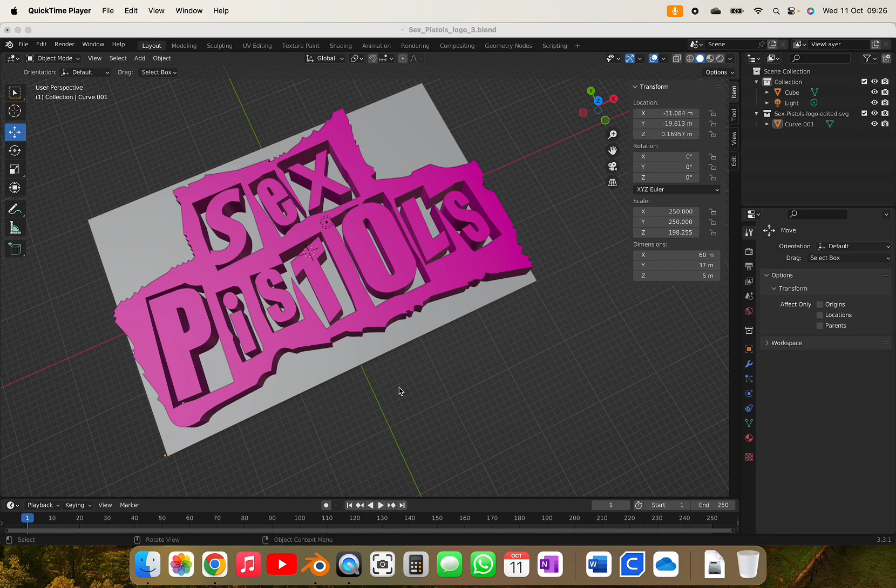Hello and welcome to this video, where I'm going to show you how to take this 3D model, and by the end of the video I'll have a physical item that's been 3D printed. To get there, I'll export this 3D model as an STL file, then import that STL file into a program called Ultimaker Cura. Cura will let me slice the 3D model so that the printer then prints out those sliced layers.

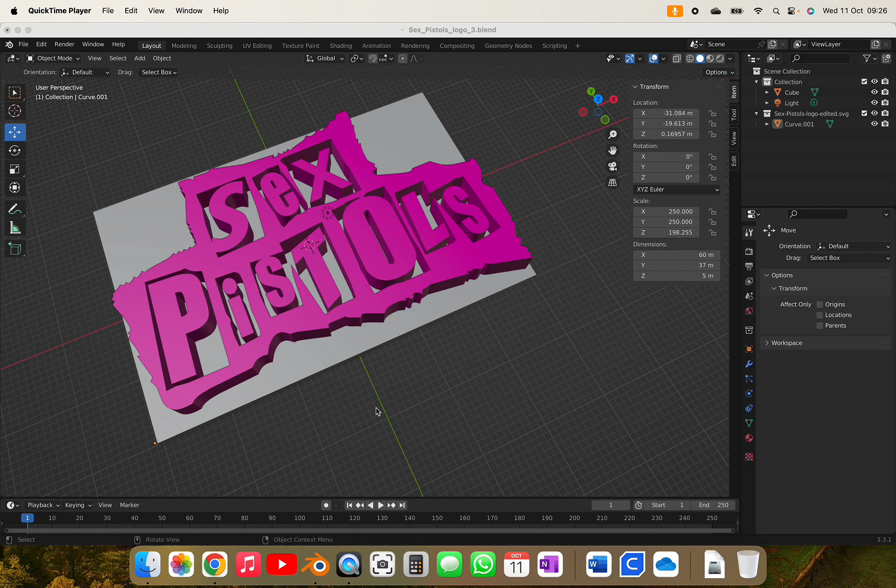Now what we'll do with that object is give it over to Guymer, who will use it to create an impression in sand that he can cast in silver, ending up with a unique bespoke model, a piece of art off the back of this model.

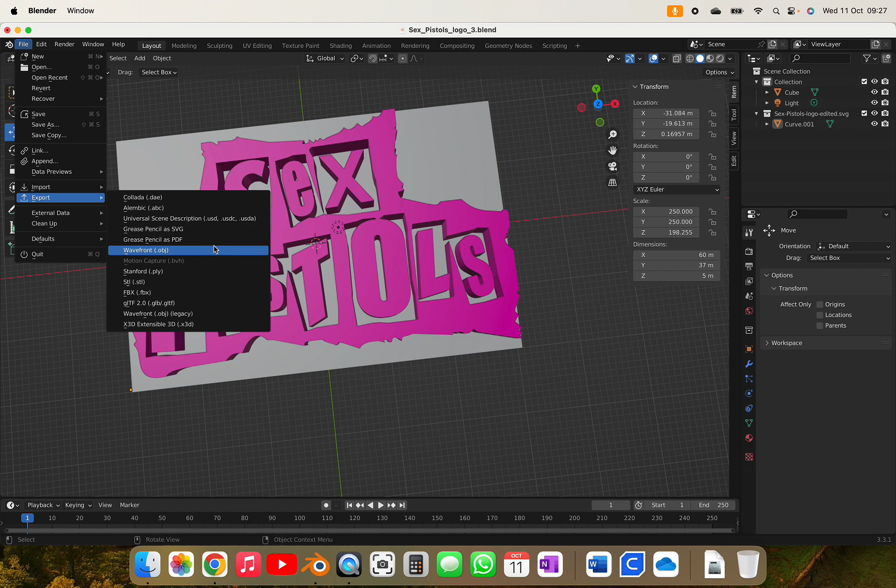So without further ado, I am going to export this model by going to File and Export, and I will be exporting as an STL file.

Now I've already done this previously, so I'm going to reuse that name, but I'll just put 'new' in front of it so I can identify the different STL file.

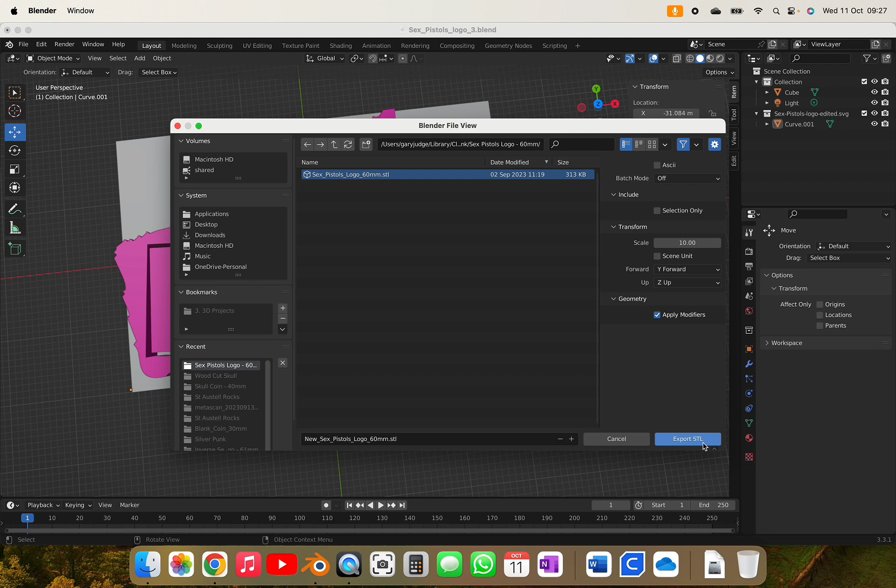And now that's done, I'm done with Blender now. It's as simple as that - just exporting as an STL.

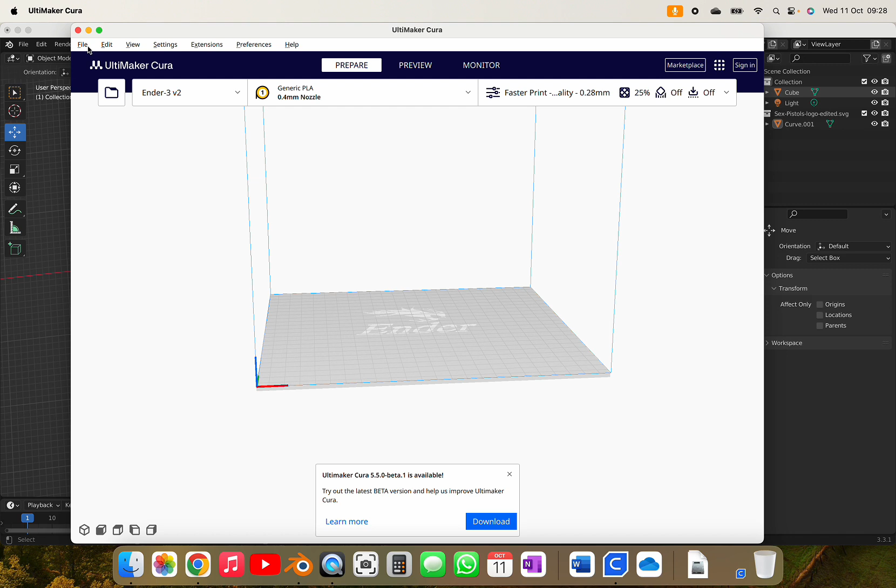I'm now going to open up Ultimaker Cura, and within Cura I'm going to do File and Open. I'm going to navigate to the file I want to import, which is the new Sex Pistols logo. This is 60mm wide along the x-axis, so I'm going to open that.

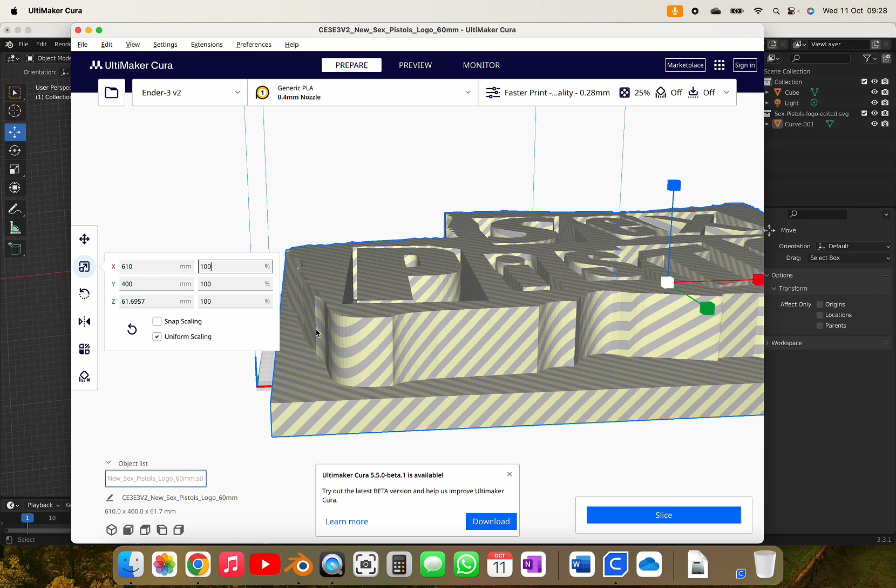Oh, and it's coming in larger than anticipated - this sometimes happens. I know for my own purposes I want this model to be about 60mm wide, actually 61mm. So I'm going to scale this down to 10%, and with uniform scaling ticked, that takes it to 10%. But as you can see here, the model is off and not on the print bed.

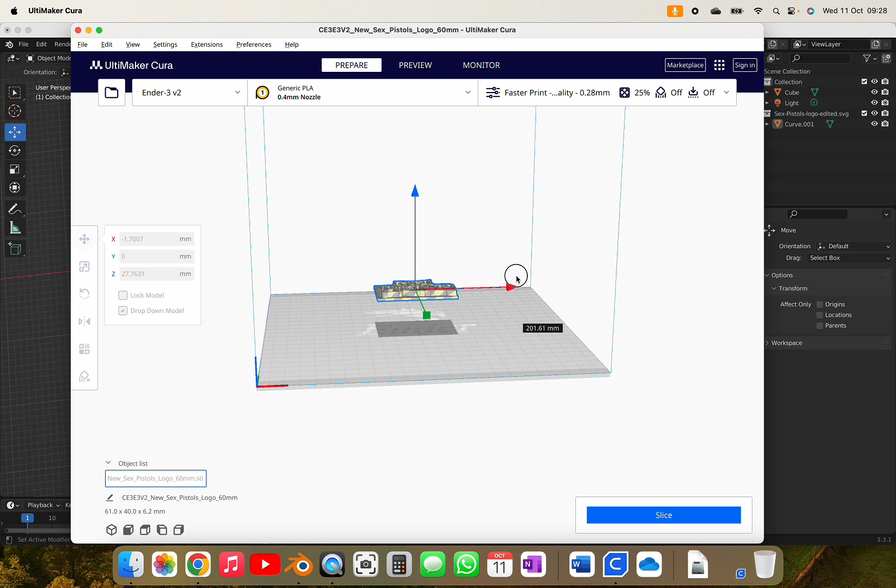So I'm going to try and just put 0 on there, for the move dimensions of the model. There you go - if I put zeros in there, it's actually done what we needed and put it in the center of the print bed.

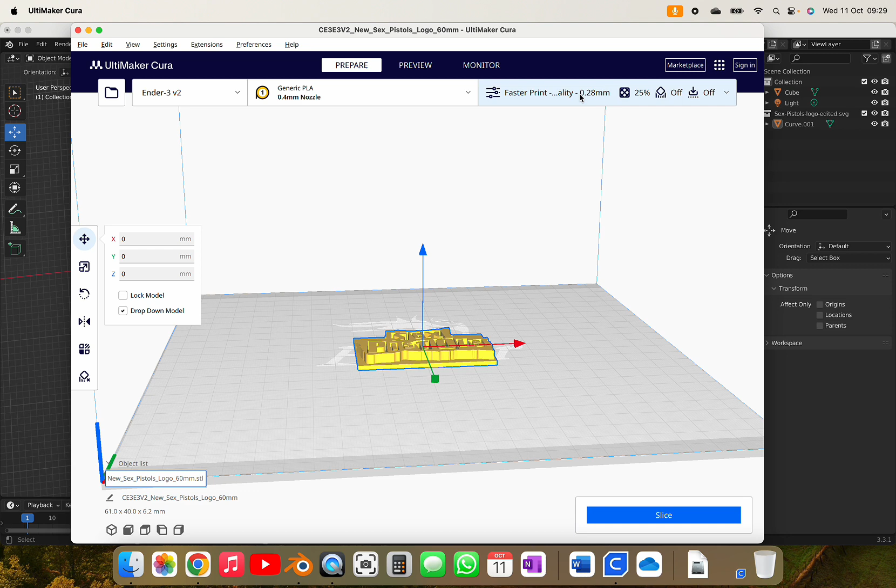Now before I slice this, I want to have a look at the print settings. At the moment I've got a faster print - it's one of my own profiles, but this is not suitable for this type of model, because of the level of detail that's in here.

If I use this faster print speed on my Ender 3 V2, I'll end up with some artifacts, some stringing, not enough detail - it won't be suitable for what I'm trying to achieve here. So instead I'm going to pick the highest quality default option, the super quality.

That's a 0.12 layer height. I'm going to discard the changes I'd made, so I'm taking all the defaults from the super quality profile.

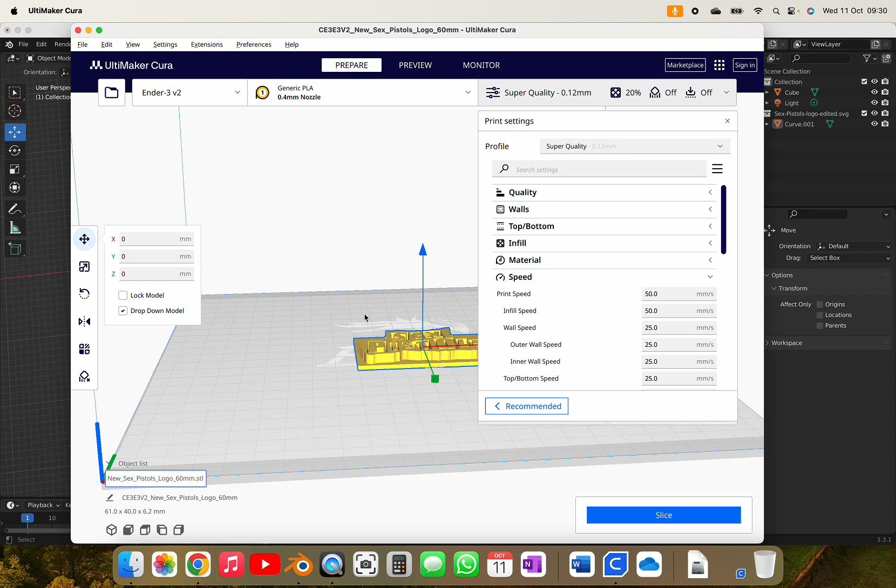Now that will mean the print is slower, but because this is a relatively small 3D model, and it's shallow as well, not terribly tall, that additional quality will take more time - it's going to take 2 hours and 47 minutes.

But if I just temporarily change this to, let's say, standard quality, you'll see that's faster. But for the sake of an hour, I'd rather have a higher quality, low risk print in this instance.

There'll be other models where I'll be a little bit more flexible with the quality, and that's where my faster prints custom profiles come in, because then I've got much faster speed for models that don't require the same level of detail. So your needs as to what level of detail is required, and how risk averse you are to actually getting your printout, should determine the settings you pick, especially if you're using the standard profiles before changing all of these one by one.

But anyway, that's what I'm going to do, and it's going to take 2 hours and 47 minutes. I'm going to save this to disk, and as you'll probably see, I like to keep all my files - so that's the Creality Ender 3 v2 new Sex Pistols logo 60mm. I'm going to save that G-code file along with the other files I've created - the Blender file, the exported STL files - and keep that G-code there.

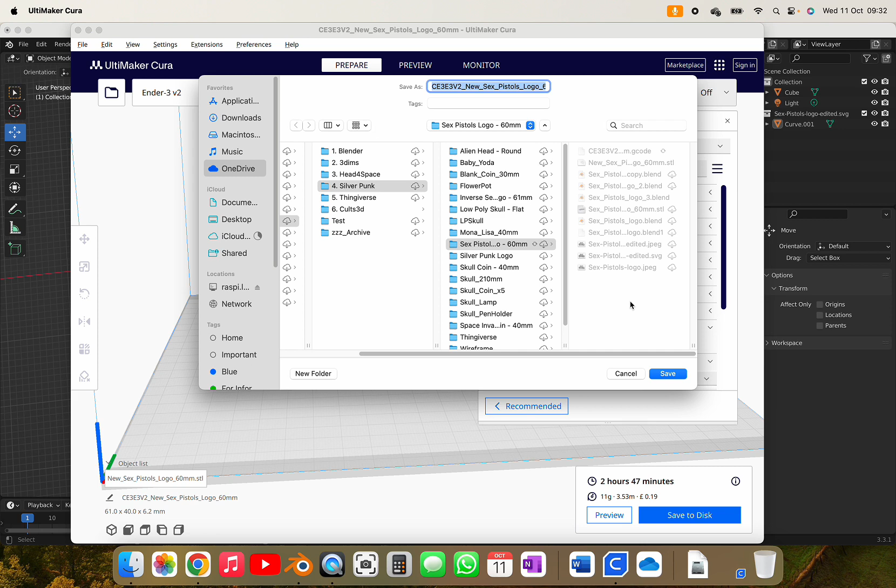The reason I do that, and I'll also save this project in that location, is if I need to get back to this, the quickest way is to reopen Cura and open the file I've already exported, rather than having to export from Blender and import here and mess about with all this. So this just saves a bit of time in the future.

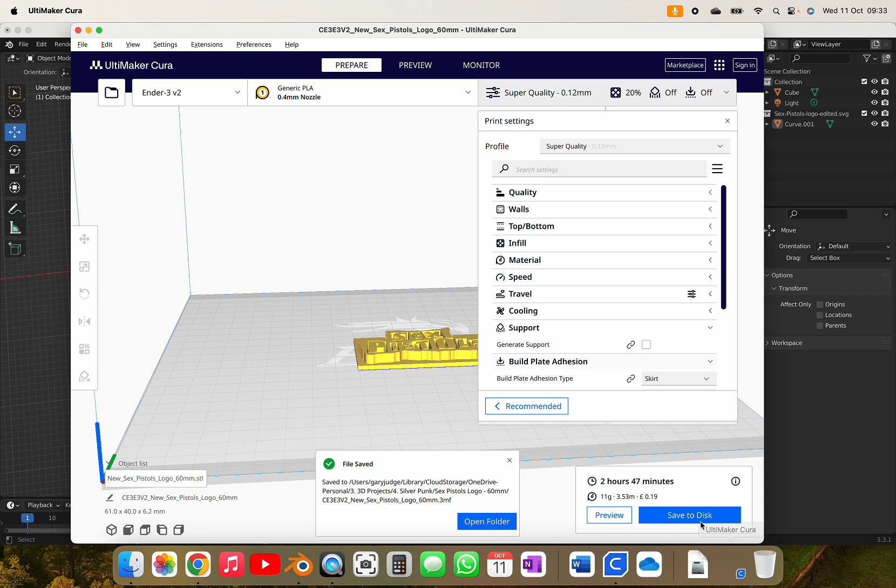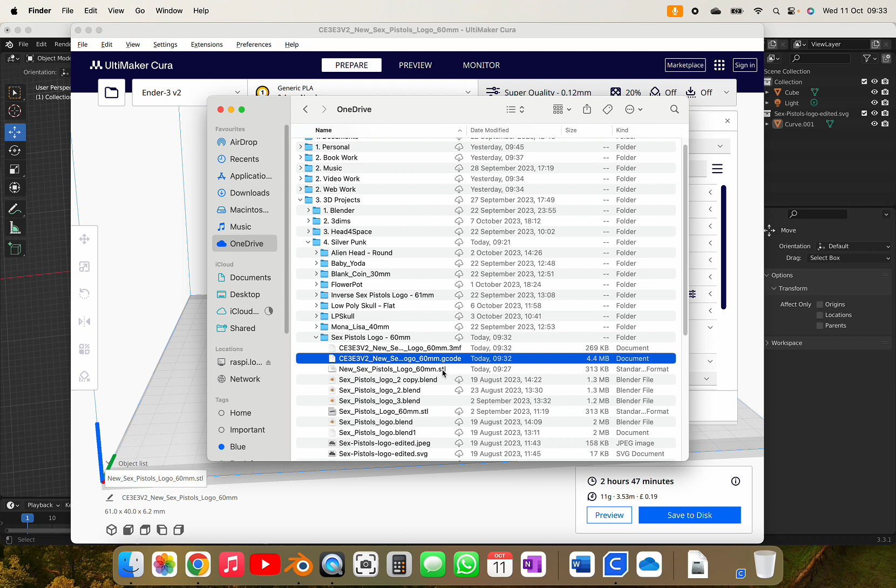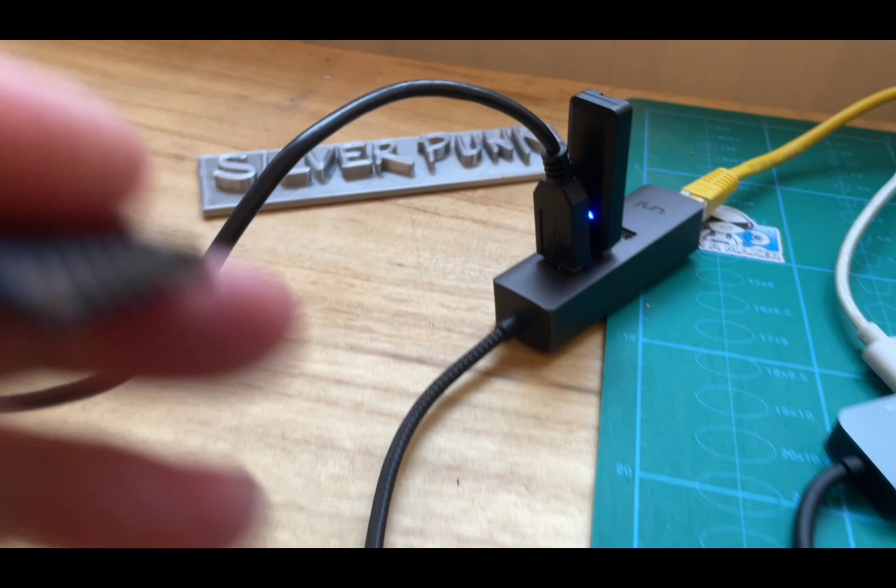So now if I go to that location, what I'm going to do is move that G-code file over onto an SD card that I can then insert into my 3D printer and kick off the printing. So now I'm going to take the SD card out of the computer and plug it into my 3D printer.

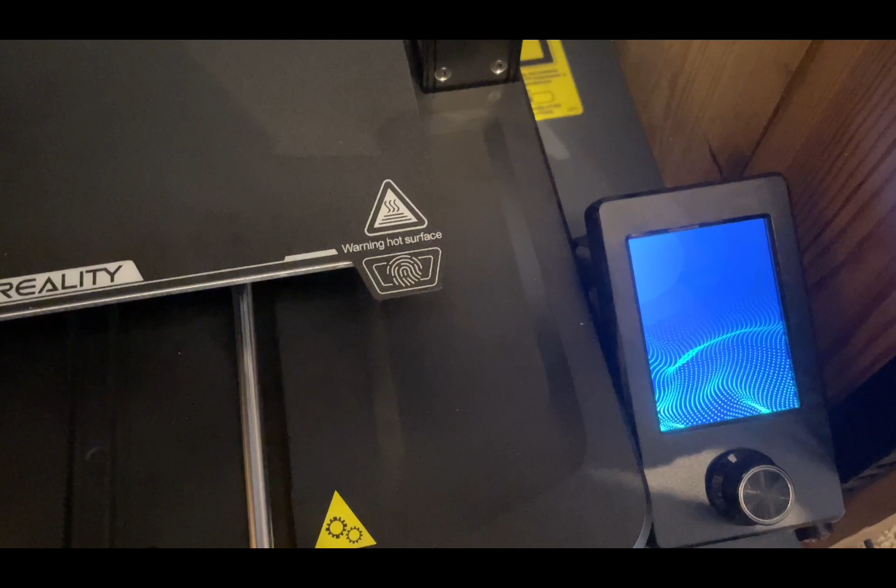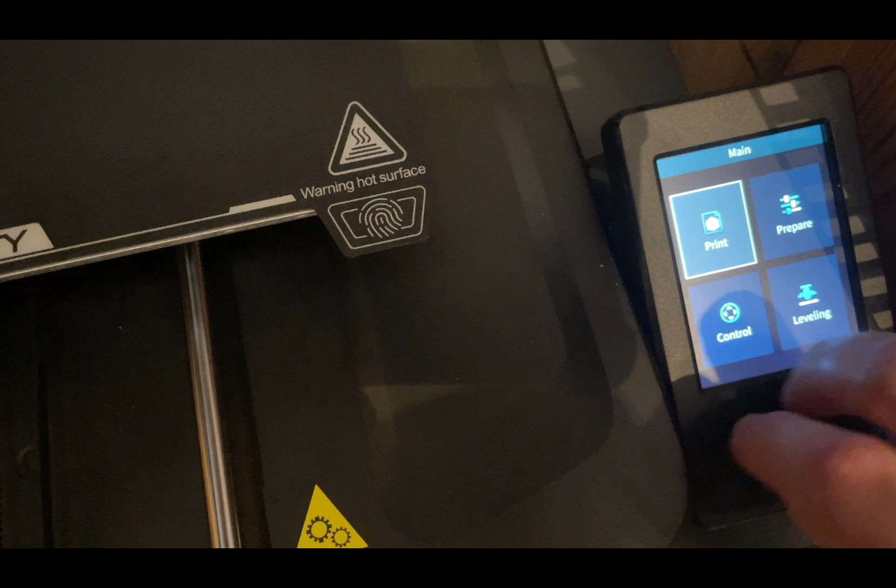So I'll boot up the printer, and then kick the print off. That's just a case of preheating the PLA, and all that's doing is warming the print bed and the hot end - the extruder. This is the Ender 3, so the extruder, print nozzle and print head are all in one. That's warming up so that when the print starts, the filament comes out nice and warm.

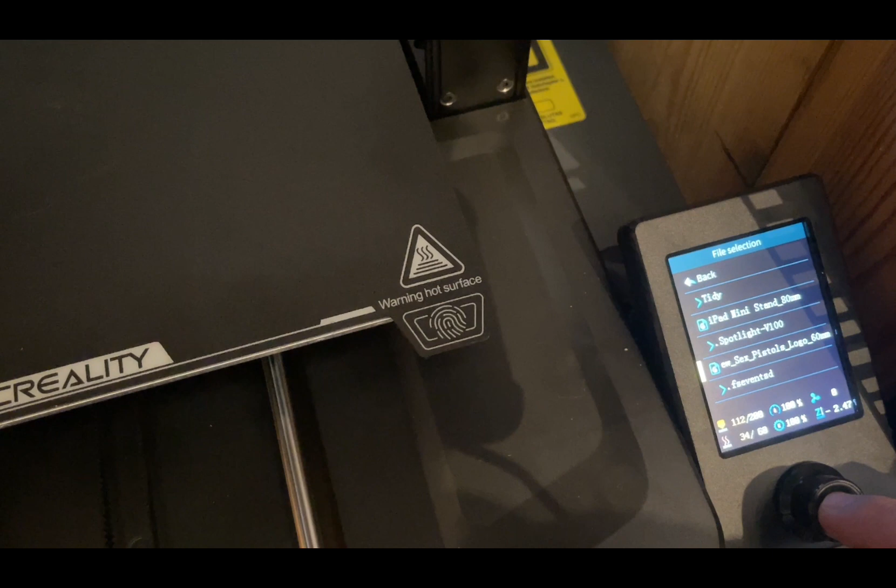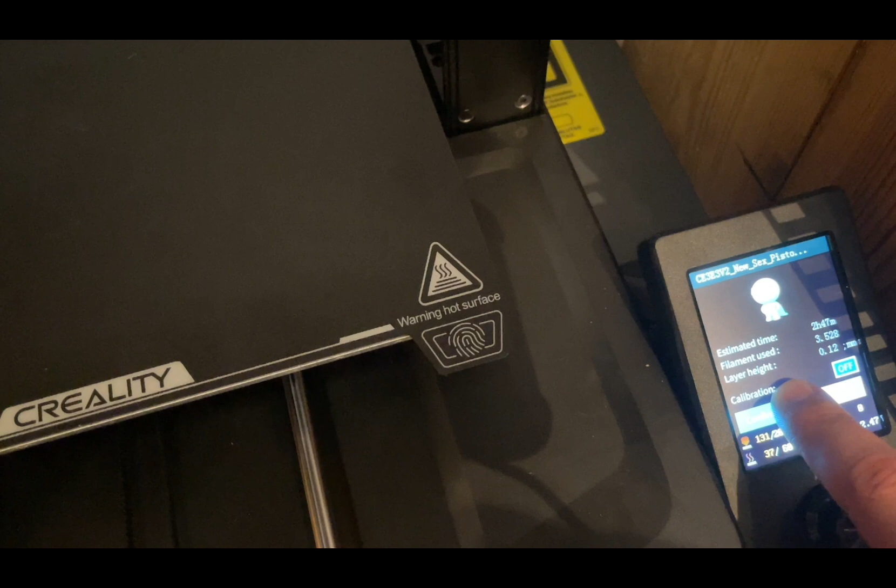Select print, and then we'll see that this file is the one I've copied over onto the SD card. I can set print now. I'm not going to do any calibration this time because I know it's quite a simple model for us to print, and the calibration's been done recently, so I'll leave that off, and confirm that.

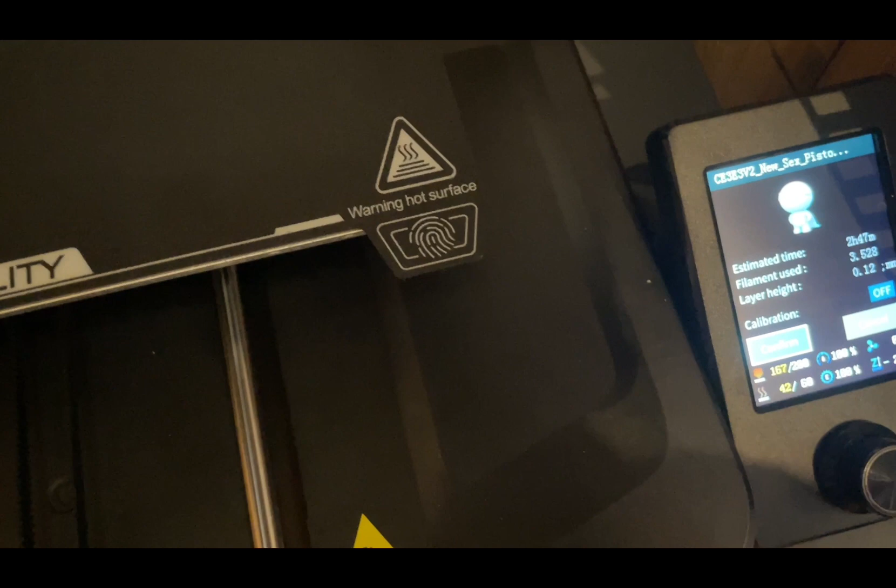And then when the temperature gets to 200 degrees at the hot end and 60 degrees on the print bed, this will be ready to print.

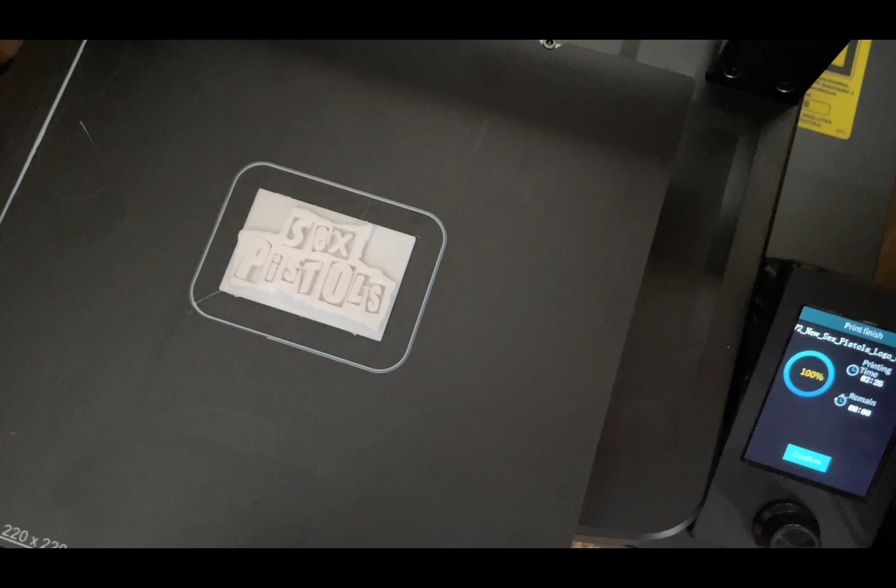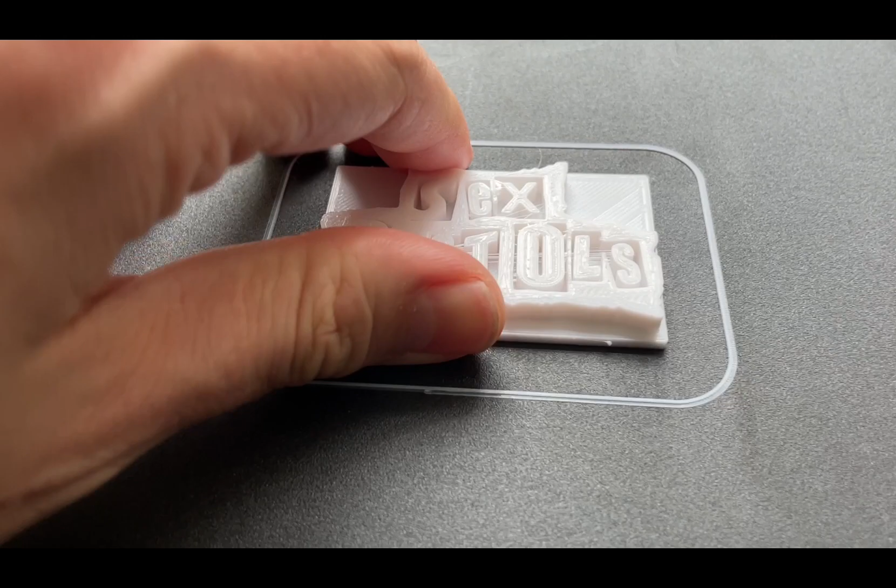Okay then, so here we go - the printed model is now complete. Just take it off the 3D printer and give this a bit of a pull to get it off.

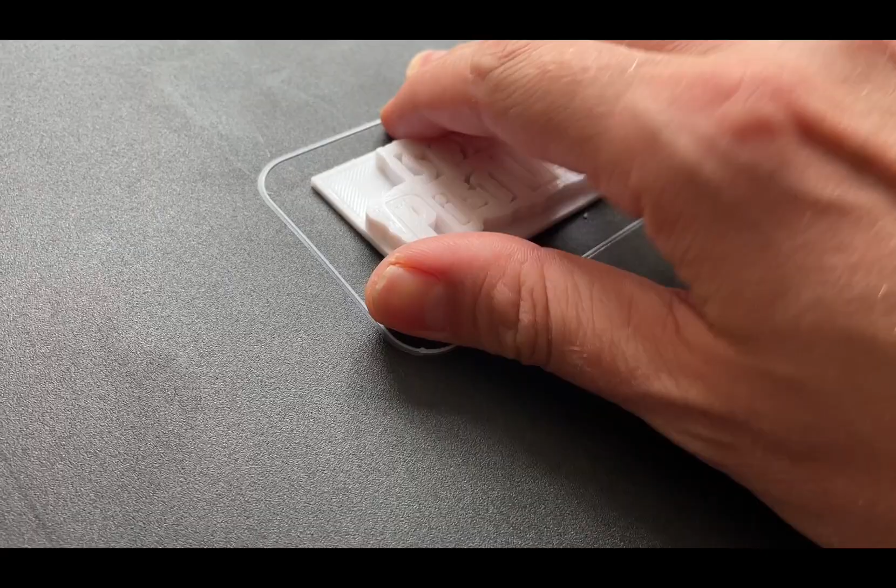Right, so off the printer, this is looking really good. There's a few elements of stringing which need a little bit of tidying up, but otherwise this is all set and ready for use as an impression for the sand casting and then pouring silver into it. So yeah, really happy with that.

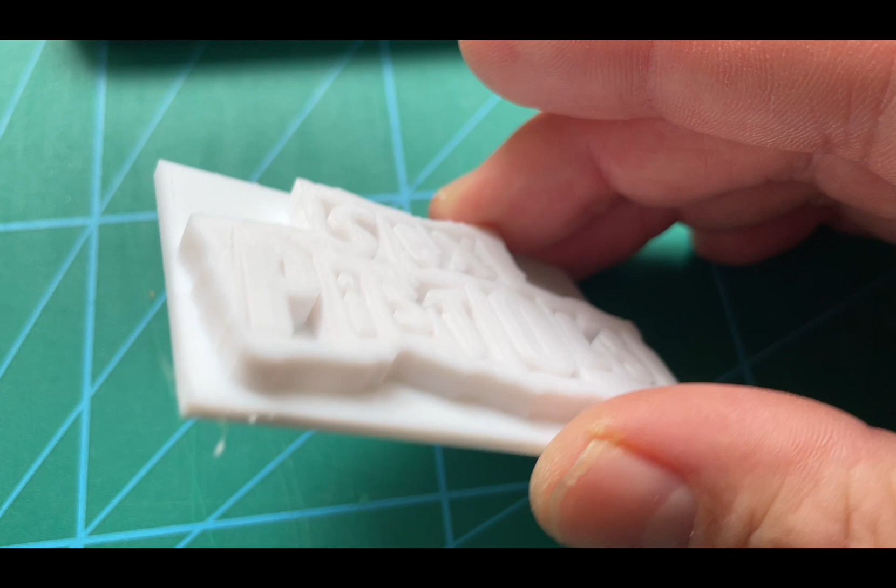Guy will be able to do some good work with this, I'm sure. I think there's some really nice detail that's been captured as part of the print process - a nice flat surface. Yeah, I think that's going to work out really well.